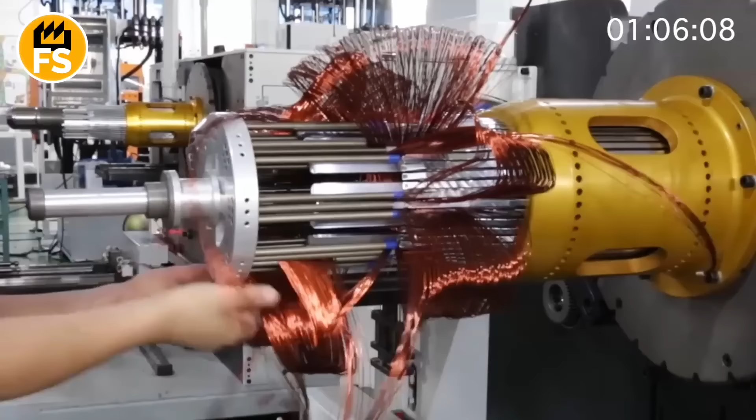Every year, over 300 million electric motors are manufactured worldwide, from miniature ones that spin coolers in laptops to giants that power trains, factory lines, and mine elevators. And each one of them is not just a coil of wires and iron, but a complex system of dozens of precisely calibrated parts. How is the heart of a machine born?

Why is winding similar to weaving and balancing to jewelry making? And how does one spark power a rotation that will last for thousands of hours? Let's take a look behind the scenes of one of the greatest technical processes, the creation of an electric motor.

Inside every electric motor is a true mechanical electrical universe. The main components of a motor are the stator, rotor, shaft, bearings, housing, as well as a cooling system and terminal box. The stator is the stationary part, located in a circle inside the housing. It's what creates the magnetic field that makes the rotor spin.

Inside the stator is a core made of layers of thin electrical steel, which reduces losses from eddy currents. In the slots of the core is a winding of copper wire, connected in a special way to create a rotating magnetic field. The rotor is the moving part inside the stator. It either has its own winding or is made in the form of a squirrel cage, aluminum bars cast into a steel core, which form closed current loops. When the stator's magnetic field interacts with the rotor, it starts to rotate.

The shaft is a rod that passes through the rotor and extends outside the housing. It's on this shaft that pulleys, impellers, reducers, or other drives are mounted. It transmits rotation to the mechanisms. The shaft must be precisely centered. Otherwise, the motor will vibrate and wear out quickly.

Bearings, usually two, one at each end of the shaft. They ensure smooth rotation with minimal friction. For reliability, they are lubricated with special greases or are sealed. The housing protects the internal elements from dust, moisture, and mechanical damage. It often has fins for heat dissipation or even a fan. The material is cast aluminum or cast iron, depending on the power and purpose of the motor.

The cooling system: most often it's simple air cooling, a fan on the shaft drives air flows through the housing. In large industrial motors, liquid cooling or external air circulation through special channels is used. The terminal box is on the outside of the housing. This is where the power cables are connected to the stator winding. Inside, contacts, clamping screws, and sometimes temperature sensors.

In the depths of the factory, in a workshop that smells of varnish, metallic dust, and warm insulation, stands a giant stator. A stationary ring with slots around its circumference. This is its core, made of thin steel sheets, tightly pressed together. In each slot of this ring will lie copper wire, carefully laid, loop by loop, turn by turn, because whether the motor will rotate at all depends on this.

Before starting the winding, the stator frame is thoroughly prepared. The slots are lined with special insulating liners, like nests for the wire. These are materials that withstand high temperatures, vibrations, and electrical loads. And only when they are sure that the insulation is perfect, the winding machine is started.

The machine, resembling a giant spool that unwinds copper wire from a bobbin, wraps it around guides and lays it in the slots. Everything is automated, but under the supervision of a specialist. One sharp movement, and the wire could lay with a kink or snag the insulation. And that's a potential short circuit.

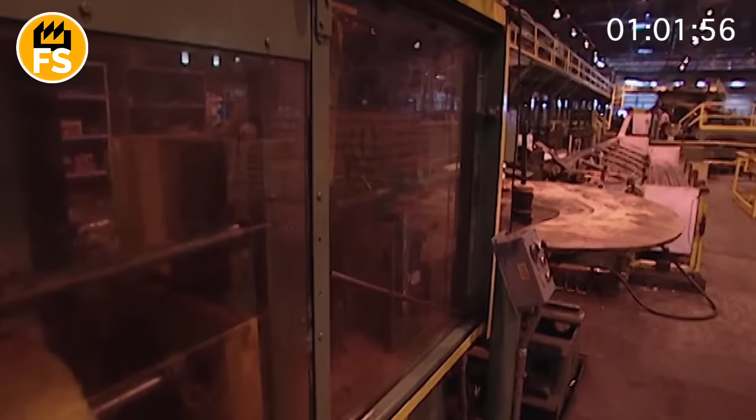For powerful or non-standard motors, winding is done by hand. A worker inserts the wire in a loop, pulls it through with a tool, presses it to the bottom of the slot, secures it, and tightens it. The work is similar to weaving, but with shiny copper and immense responsibility. Each coil, and there are dozens of them, must be identical, symmetrical, and correctly oriented.

After the first layer of winding is completed, interphase insulation is laid, and then the second layer is placed. The wire forms closed loops, phases, which are then connected in a star or delta configuration, depending on the motor's setup. Then, the wires are secured with strings or plastic fasteners. The tension and geometry are checked, and if necessary, adjusted by hand. And finally, impregnation with varnish or epoxy resin, so that all this doesn't shift even a micron under vibration and temperature under load.

If the stator is the skeleton, then the rotor is the muscle. It moves, rotates, creates torque. It's not visible when the motor is running, but it's what drives everything, from a fan to a train. At the core of the rotor is a steel shaft, long and powerful.

Around it, the core is mounted, a set of thin electrical steel sheets stacked into a cylinder. The sheets have slots. These are for the conductors. This is where the most interesting part begins, creating the winding that will make the rotor come alive.

One of the most common options is the squirrel cage. Aluminum or copper bars are inserted into the slots, and both ends are cast into rings, like a hoop around a cage. This creates a closed current loop. Such a design doesn't need to be connected directly. Current is induced inside automatically as soon as the motor starts. It's a simple, reliable, and mass-produced option for industry.

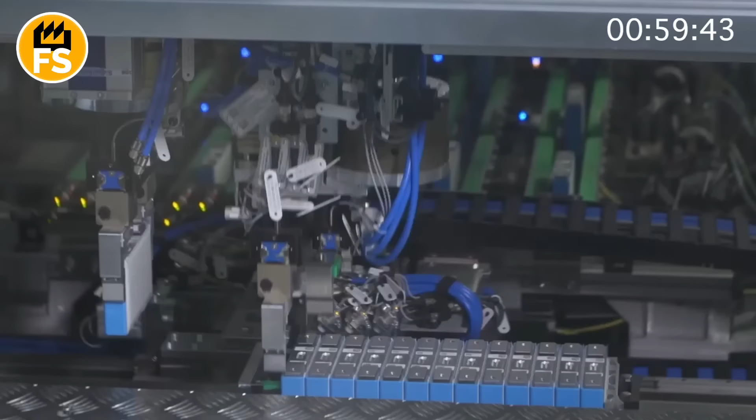But if the motor is more complex, more powerful, then classic windings are used. A worker manually lays copper wire in each slot, carefully tightening it, bending it at an angle. Here, symmetry, precise geometry of the turns, and perfect insulation are important. The wire must lie right, not touching the metal anywhere, not crossing over, not being too tight or too loose. A mistake, and the motor will overheat or fail.

The rotor windings are then connected in a specific sequence: star, delta, or another type of connection. Everything is secured, insulated, and sometimes varnished. The insulated ends are led out to slip rings or brush assemblies, depending on the design. After this, the rotor is balanced, as it has to rotate at speeds of thousands of revolutions per minute. Any extra 100 grams on the edge, and everything will vibrate, hum, and heat up.

The result? A compact, shiny cylinder with windings of copper wire or closed bars. It will be inserted into the stator, and the magic of converting electricity into motion will become possible. It all starts with checking dimensions and tolerances. The gap between the rotor and the stator, the so-called air gap, must be very small. If it's too narrow, friction will occur. If it's too wide, the magnetic field will be weak, and the motor will lose efficiency.

The rotor is mounted inside the stator via bearing assemblies. Sometimes special guides or hydraulic presses are used for this. The rotor shaft must rotate perfectly straight, otherwise everything will vibrate or break down within a week. At the ends of the rotor shaft, sleeve or rolling bearings are installed. They allow the rotor to rotate without friction. The bearings are placed in so-called end shields, which are then attached to the motor housing. All surfaces are pre-lubricated with special greases to ensure durability.

The ends of the stator and, if necessary, rotor windings are led out to the terminal box. Here they will be connected in the required circuit, star, delta, or another. In complex motors, temperature sensors are installed to detect overheating before a failure occurs. The motor is now assembled, stator and rotor in the housing, wires connected, bearings in place. But it's too early to start it. First, varnishing, drying, balancing, and testing, all like a ritual before the birth of a real machine's heart.

In a spacious room with a specific smell of epoxy resin, the stator windings, and sometimes the rotor, are coated with electrical insulating varnish. This isn't just for dust protection. The varnish strengthens the structure, secures the wires so they don't vibrate at high speeds, and prevents moisture penetration. Application is either by dipping in a bath or by spraying. The motor is completely submerged in a tank of varnish, then removed and left to drain off the excess. Next is drying in a thermal chamber at a temperature of 250 to 300 degrees Fahrenheit. This stage resembles baking. The varnish polymerizes and forms a hard protective film.

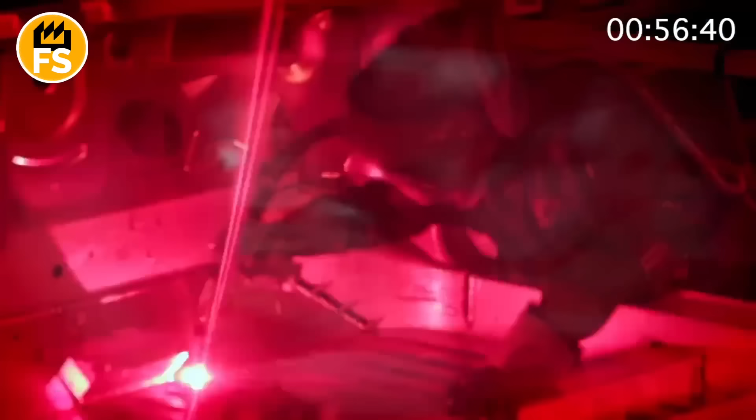After varnishing, the most sensitive stage, the motor is installed on a balancing stand. The system is like a huge record player. The motor rotates at high speed, and sensors detect the slightest deviations. Even a few grams of excess mass on the rotor can cause vibration that will destroy the bearings, shorten the service life significantly, or even ruin the motor. To eliminate the imbalance, engineers drill microscopic holes in the heavier part of the rotor, removing excess metal. This is almost a jeweler's craft.

The finished motor is sent to the test stand. Here it comes to life for the first time. It's connected to a power supply. Rotations, noise, heat, current consumption are recorded, and efficiency and power are measured. Everything is documented. The motor's passport contains dozens of parameters.

If the motor passes all tests, it's packaged, a seal is applied, and an instruction manual is added. And very soon, this motor could be working on a conveyor, in an elevator, or in an electric train, wearing down metal and converting current into motion, without rest for tens of thousands of hours.

Every year, the world produces over 200 million kilometers of cable, enough to wrap around the Earth 5,000 times. But few people know that the heart of every electric car is not just the battery, but also a cable that can withstand voltage, temperature, pressure, bends, and vibration.

How are these high-tech wires created, capable of working in conditions where even metal seems alive? How do scrap, dust, and molten aluminum turn into the arteries of Tesla, Rivian, and Lucid? In this video, the whole truth about the most engineered wire of the 21st century.

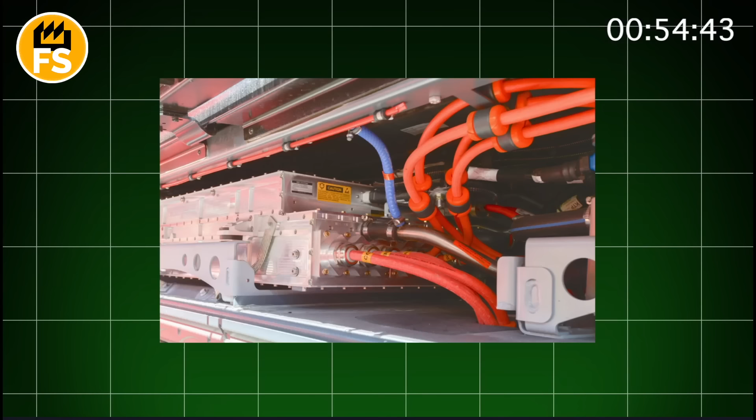Every cable for an electric car is a strategic choice. It must be flexible but not brittle, conductive but not vulnerable, lightweight but capable of withstanding hundreds of amps and thousands of hours of voltage. And when engineers sit down at the drawing board, they are like alchemists of the future, mixing formulas of elements in their heads, searching for the perfect balance.

Copper is the good old classic. It conducts electricity better than anything else, and it's its heart that beats in most cables. But the weight, oh, that weight! An electric car needs to be as light as a cat, so aluminum often steps in as a substitute. It's cheaper and lighter, though not as conductive. But in the right alloy, it's already a weapon of the electric age, and around it, insulation.

These are highly engineered polymers that can withstand heat, cold, chemicals, vibration, dust, and even a small lightning strike under the hood. They lack the shine or weight of metals, but without them, everything would turn into a sparkling inferno.

Some cables have shielding, a thin armor of copper braiding or aluminum foil. It protects signals from interference, because in an electric car, not only kilowatts are important, but every millivolt of data too.

Aluminum isn't born shiny. First, it's rough ingots, each weighing over 1,000 pounds. They arrive at the factory like aliens from their ore world, extracted from bauxite, purified, remelted, and finally formed into rectangular blocks resembling metal sarcophagi.

These ingots arrive in large trailers, carrying tens of thousands of pounds of the future. By appearance, they are just shiny silver blocks, neatly stacked on steel pallets. But just get closer, and you'll feel it. A warmth of energy emanates from them, encapsulated in atoms.

Sometimes, instead of ingots, the factory receives aluminum coils. This is already processed aluminum wire, wound into coils 3 or 4 feet in diameter, each weighing about 500 pounds. They shine like snake coils and glisten in the light, as if they just came out of a cybernetic beehive.

Separate batches are supplied as aluminum scrap, meaning leftovers from other productions, cuttings, shavings, fragments of frames. They are sorted, cleaned, remelted, because in this future, not a single crumb of metal goes to waste. As soon as aluminum enters the factory gates, it is identified, tested, and marked.

In the first stage, technicians inspect the ingots or coils, checking for cracks, corrosion, impurities on the surface. It's like a quick checkup, by eye, by hand, with a scanner. If rust, oxidation spots, or transport damage are noticed, the metal is either sent for remelting or rejected.

Next, chemical expertise. A piece of each ingot is taken and checked on a spectrometer. This device shoots the metal with a laser, captures the reflected waves, and shows how much aluminum, iron, silicon, copper, magnesium, and other elements it contains. The goal is to make sure it's the right grade.

After passing the tests, the ingots are marked with a batch identification number, alloy grade, date and place of melting, and sometimes a QR code that leads to a full technical passport. It's like a birth certificate that will travel with the metal until the moment it becomes wire and ends up inside a Tesla, Rivian, or Lucid.

When the ingots have passed inspection and received their quality mark, they are loaded into giant electric or gas furnaces. The temperature inside, over 1,220 degrees Fahrenheit, is exactly what's needed to turn aluminum into liquid silver. No alchemy. We're talking about molten metal.

The damper opens, and massive cranes carefully lower the ingots into the red-hot interior. The metal slowly melts, releasing a gray vapor and a strange smell, a chemical mixture resembling heated foil and ozone.

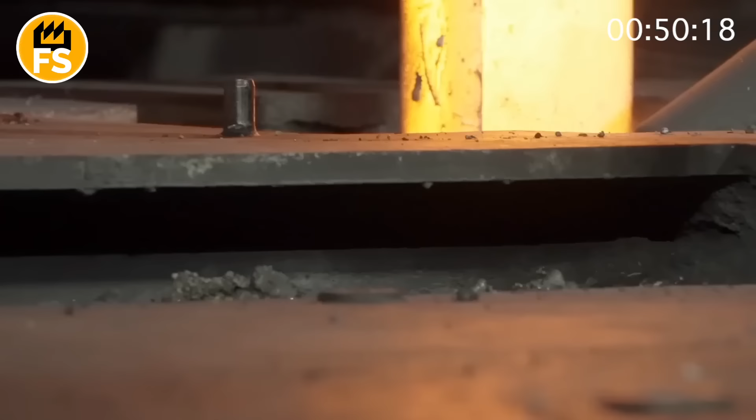Nearby, operators in heat-resistant suits looking like astronauts carefully monitor the furnace indicators: temperature, impurity level, viscosity. No mistakes are allowed here, as the cable for an electric car must withstand thousands of miles and hundreds of charges.

A slag layer appears on the surface of the molten metal: impurities, oxides, residues of alkaline metals. It is removed manually or by automatic systems to leave only a clean, homogeneous mass. Sometimes, modifiers or alloying elements are added to give the metal the desired properties: more conductivity, strength, flexibility.

Molten aluminum is poured into casting molds, usually round blanks 4 to 6 inches in diameter and up to 10 feet long.

These are the future rods from which cables will be drawn. The process is called casting billets. Cooling is controlled in stages to avoid cracks. All this is accompanied by hissing steam, the roar of pumps, and a rhythmic thud, the heartbeat of the cable factory.

So what is drawing? It's a process where aluminum rods are pulled through a series of increasingly narrow holes. With each pass, the metal becomes thinner, longer, and stronger. Like a piece of dough being rolled out into noodles, only instead of dough, it's hot aluminum, and instead of a rolling pin, hydraulic machines weighing tens of tons.

Before drawing, the blank is heated to an optimal temperature, no more than 650 degrees Fahrenheit, so it becomes plastic but doesn't melt. Then it's fed into a drawing machine, where the magical transformation begins. Each pass through the die reduces the wire's diameter by a few percent. It's like passing through increasingly tight doors, forcing the material to stretch.

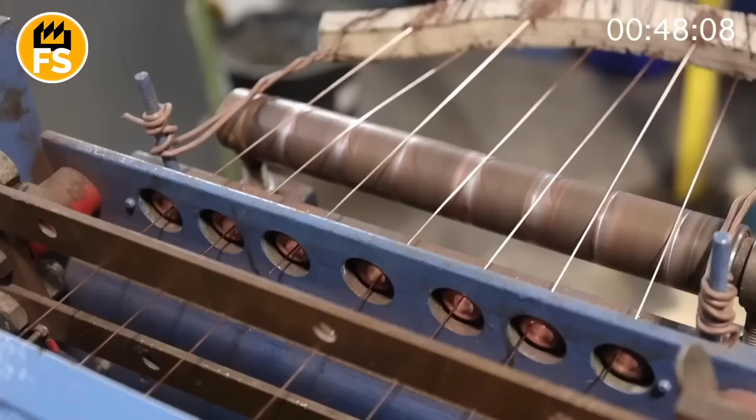After a dozen such passes, a thick rod half an inch in diameter becomes a slender strand 0.1 inch thick or even less. During drawing, the wire heats up from friction, so it's constantly cooled with water or special lubricants. Without this, it would overheat, lose its shape, or even break. Lubrication also reduces wear on the tools, dies made of carbide or diamond.

Some machines can draw wire at speeds over 2,000 feet per minute. It's like someone pulling a spider web from a ball of lightning. Engineers carefully monitor the tension, temperature, shape, and shine of the wire, because even the smallest crack or geometry violation is a future short circuit in a $60,000 car.

When the drawing is complete, the cable thread already looks like a shining string for a future electro-magical harp. It's long, thin, conductive, but still stubborn. To be able to wrap around batteries, penetrate narrow body channels, and withstand hundreds of thousands of bends in the motion of an electric car, it needs to be annealed.

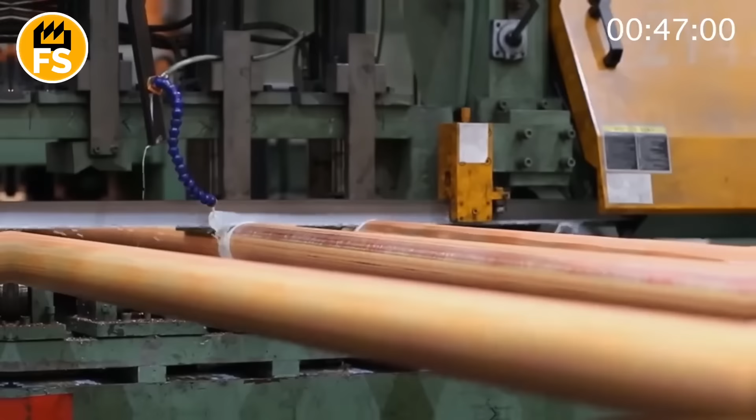The wire slowly passes through furnaces without an open flame, or through an induction field that heats it from the inside. The temperature, around 600 degrees Fahrenheit. This is the point where the metal doesn't melt, but changes its character. The atoms, which until now held onto their nodes in a stressed crystal lattice, finally relax. Like soldiers after a battle, like a string that has sounded at its maximum, and finally fallen silent. The metal structure becomes more uniform, the grains larger, and the wire itself flexible, elastic, calm.

The surface of the wire after heat treatment is darkish, with scale or signs of oxidation. It is cleaned off with abrasive brushes or in chemical baths. Aluminum must shine, like a star before a rocket launch. The cleaner the surface, the better the insulation will adhere.

Next, insulation. An ultra-thin layer of material is applied to the wire, separating it from everything except the current. This can be polyethylene, Teflon, silicone, or enamel, depending on the cable's intended purpose. The material is applied in liquid form, often in heated baths or through nozzles that cover the wire with a uniform flow. The application temperature, over 400 degrees Fahrenheit.

As soon as it's applied, it's immediately baked. The insulation doesn't dry, it polymerizes. It's like creating a skin around the nervous system. It must be perfectly even, dense, without microcracks. Otherwise, the wire won't pass the test.

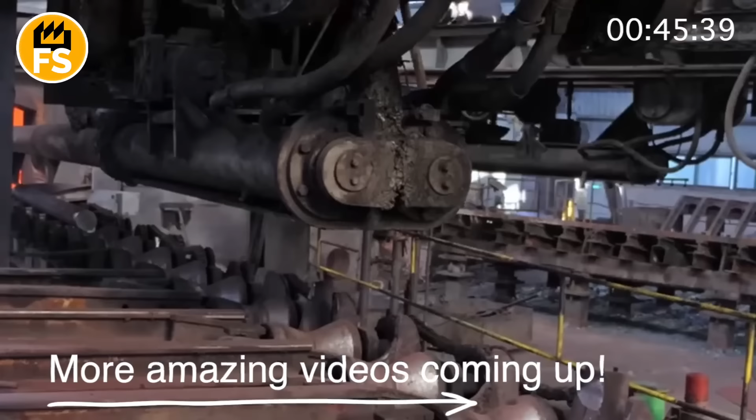Next, the wire passes through detectors that check it for breakdown, coating thickness, and electrical resistance. At least once every 1,000 feet, samples are taken manually and checked under a microscope. Everything is recorded because this wire will later work in high-voltage systems.

The finished wire is cooled, lubricated to reduce friction, and then carefully wound onto drums or spools, sometimes up to 5,000 feet long. This is no longer just metal, it's the nerve of an electric car, ready to hit the road.

Did you know that the machines powering global industry, transportation, and our electrical grids consume energy equivalent to building thousands of the Great Pyramids of Giza every single day? This hidden power isn't just about raw force. It's delivered by some of the most massive and awe-inspiring engines ever conceived.

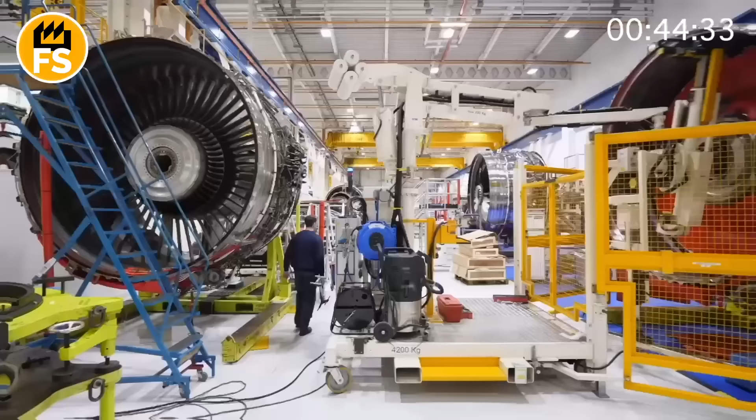From the dawn of the industrial age to today's modern world, engineers have chased the dream of bigger, stronger, more efficient powerhouses. Get ready to take a journey through history and dive into the incredible scale and engineering genius behind the world's most powerful and giant engines.

Our journey begins in the age of steam, a time when raw pressure was king. Picture the late 18th and 19th centuries. The engines that drove the Industrial Revolution weren't small. Early steam engines were clunky, but they quickly grew into colossal machines. Think of the beam engines, towering structures in factories and mines, with massive beams rocking back and forth, driving pumps and machinery with the power of boiling water. These were mechanical giants, their sheer physical size necessary to contain the immense forces of steam pressure.

As steam technology evolved, so did the engine's power and scale. Reciprocating steam engines became the heartbeat of global shipping. Imagine the engine room of a massive early 20th century ocean liner. You'd see multi-cylinder engines with pistons the size of trash cans, connecting rods like tree trunks, and crankshafts so large they needed multiple men just to inspect them.

These engines were colossal, spanning multiple decks, their rhythmic pounding driving propellers powerful enough to push thousands of tons across vast oceans. They were engineering marvels of immense moving parts, powered by the simple expansion of steam.

While steam dominated for a long time, the early 20th century saw the rise of a new kind of giant, the diesel engine. Unlike external combustion steam engines, diesels burn fuel directly inside the cylinder. This was a game changer for efficiency and power density. Early large diesels quickly found their way into ships and power generation.

Imagine a large, slow-speed marine diesel engine built for a cargo ship. These engines are absolutely colossal, often standing as tall as a multi-story building and stretching the length of a gymnasium. Modern marine diesel engines, like some built by Wärtsilä or MAN, are among the largest machines on Earth. The biggest ones have multiple cylinders, each with a bore diameter wider than a grown man is tall.

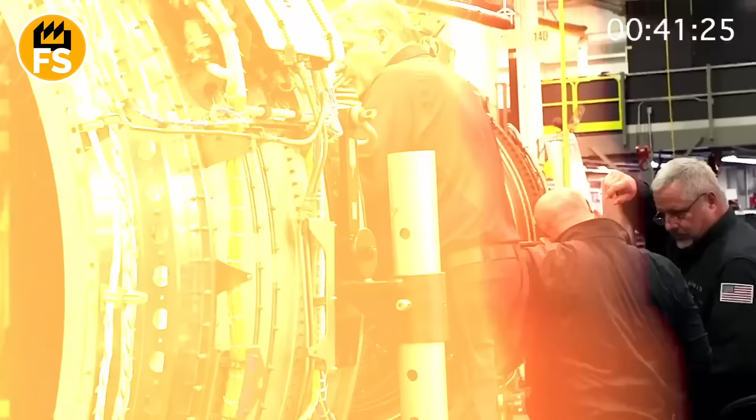Their crankshafts are multi-piece monsters, weighing hundreds of tons. These engines produce over 100,000 horsepower, enough to move supertankers and container ships carrying 20,000 containers. The sheer scale of these components, pistons, connecting rods, crankshafts, cylinder blocks, is mind-blowing, a testament to achieving immense power and torque from internal combustion.

As technology advanced further, especially in the mid-20th century, the gas turbine emerged as another powerhouse. Unlike diesels or steam engines that use pistons, gas turbines burn fuel to create hot gas that spins a turbine wheel, similar to a jet engine. While aircraft engines are built for power to weight, industrial and power generation gas turbines are built for sheer output. Imagine a power plant gas turbine the size of a bus or even a small house.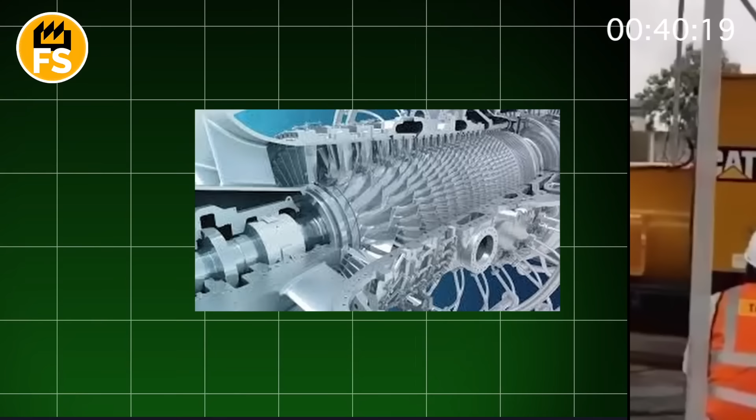Modern industrial gas turbines, like those in GE's H-Class, are engineering marvels generating hundreds of thousands of kilowatts, enough electricity for hundreds of thousands of homes from a single unit. They involve incredibly complex internal components, spinning at thousands of revolutions per minute in temperatures hotter than molten lava.

Their power output, efficiency, and relative compactness compared to older technologies make them the giants of modern electrical generation. Some large ships, including cruise liners, also use gas turbines for their combination of power and smoother operation.

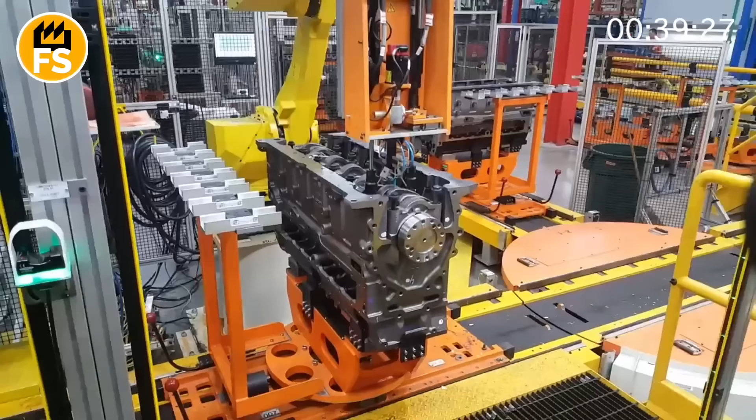Comparing these generations of giants is fascinating. Steam engines were the pioneers, relying on brute pressure and massive physical structures. Diesel engines brought efficiency and incredible low-end torque, dominating heavy transport. Gas turbines delivered immense power density and high-speed rotation, becoming the backbone of modern power grids and high-speed applications. Each technology pushed the boundaries of materials, science, and engineering to harness energy on an ever-increasing scale.

These engines, whether the visible, rhythmic giants of the steam age or the humming complex powerhouses of today, are the unseen heart of the modern world. They drive global trade across oceans, power the trains that move goods and people, generate the electricity that lights our cities and runs our factories, and fuel the massive pumps and machinery of heavy industry. They are a testament to humanity's relentless drive to build bigger, stronger, and more powerful machines.

So, the next time you see a massive cargo ship, a powerful train, or simply flip a light switch, take a moment to remember the incredible journey through history and the engineering genius behind the world's most powerful and giant engines. From towering steam engines and colossal marine diesels to blazing hot gas turbines, they are the hidden giants that built our modern world.

Did you know that each year the world builds structures so massive, skyscrapers scraping the sky, bridges spanning vast canyons, ships larger than city blocks, that they require metal parts shaped with forces equivalent to thousands of tons and precision measured in mere millimeters? This isn't just cutting and welding metal in a workshop. This is bending steel plates thicker than your arm, forging colossal parts under unimaginable pressure, and machining giant structures with surgical accuracy.

Get ready to witness the most impressive, largest-scale metal fabrication methods on Earth, uncovering the hidden power and precision that builds our modern world.

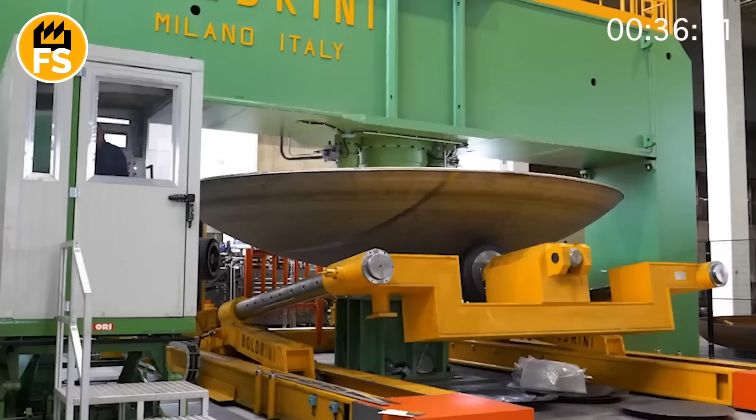The sheer scale of metal fabrication hits you right away on the factory floor. We're talking about moving and shaping pieces that weigh tons. One of the most fundamental and visually impressive processes is metal bending. Forget bending a paperclip. Imagine bending steel beams strong enough to support a building, or curving thick metal plates for ships and pressure vessels. Massive machines called press brakes or roll benders use incredible hydraulic force to shape metal.

Picture a giant press pushing down with thousands of tons of pressure to put a precise bend in a steel beam, or colossal rollers curving a thick steel plate into a perfect cylinder. These aren't just big tools. They're feats of engineering designed to apply immense force with fine control.

On the biggest scale, you see specialized machines like the FKB 3-roll plate bending machine, capable of shaping massive steel plates for tanks, wind turbines, or ship hulls with incredible accuracy. Software like Bentronic controls the rollers with millimeter precision, even on pieces the size of a room.

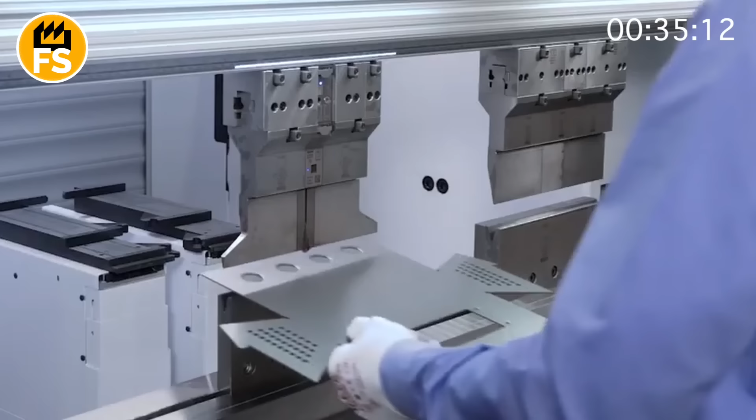Another impressive example is bending giant steel beams for structures. Machines like the Faccin RCMI use powerful hydraulic rolls and guide systems to curve huge I-beams or H-beams into exact shapes needed for complex architecture or bridges. Applying that much force while maintaining the beam's structural integrity is a true industrial art form, making metal flow like clay, but under thousands of tons of pressure.

Another mind-blowing method is metal forging. This is using localized compressive forces, often with immense power and heat, to shape metal. Think of a blacksmith, but on a scale where the hammer is a machine delivering thousands of tons of force. In massive forging presses, heated metal billets, solid blocks of steel, are pounded or squeezed into complex shapes.

This process changes the metal's grain structure, making the finished part incredibly strong and durable. This is how critical components for aircraft landing gear, engine parts, or even massive artillery barrels are made.

At places like the Watervliet Arsenal, you see iconic machines like the rotary forge. This is a different kind of forging, using rotating dies to hammer and shape a heated steel billet into a hollow tube, like a cannon barrel, with incredible speed and precision. These machines have been operating for decades, playing a vital role in producing thousands of heavy-duty barrels for military systems.

The sheer force and rhythmic pounding of these colossal machines working on red-hot metal is one of the most dramatic spectacles in metal fabrication, showcasing raw power precisely controlled.

Once metal parts are formed by bending or forging, they often need precision finishing. This is where machining comes in, using tools to cut away material and achieve exact dimensions and shapes. On the bigger scale, this involves massive CNC, computer numerical control, machining centers working on parts that weigh many tons.

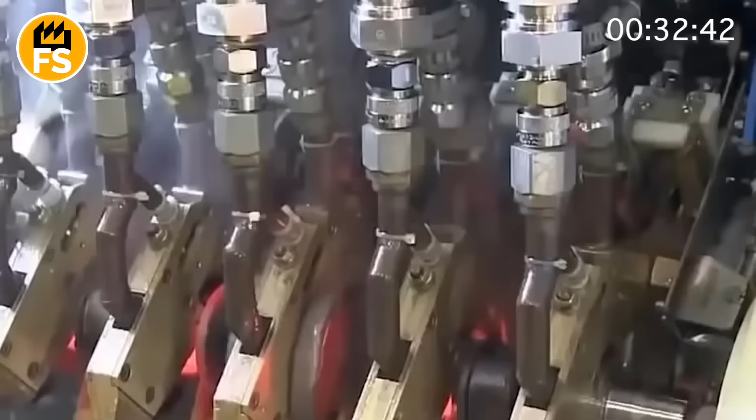Imagine a machine tool the size of a small house, precisely cutting, drilling, or milling a giant metal casting or forging with micron-level accuracy. Sophisticated software controls these machines, making complex cuts and achieving tolerances required for critical components in aerospace, heavy machinery, or energy production.

Precision machining isn't just about size, it's about achieving incredible accuracy on massive objects. Machines use advanced cutting tools made of hardened materials, sometimes cooled with high-pressure coolant, to cut through tough alloys.

On critical components like gearbox housings, turbine shafts, or large crane parts, surfaces must be machined to tolerances that ensure perfect fit and smooth operation under immense loads for decades. It's a process where technology allows engineers to sculpt giants with the precision of a jeweler.

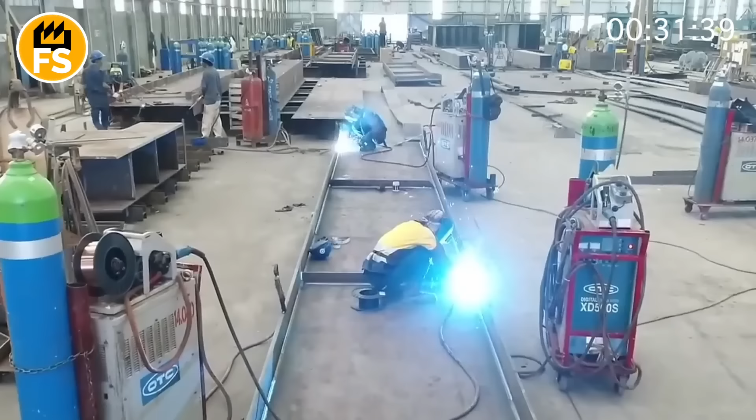Beyond these core methods, metal fabrication involves a host of other impressive processes on industrial lines. Cutting is a crucial first step, using powerful lasers, plasma torches, or water jets to slice through thick metal plates with incredible speed and clean edges.

Welding is joining metal pieces together, from automated robotic welding arms building vehicle frames or ship sections, to skilled human welders performing critical structural welds that must withstand massive forces. Surface treatment like sandblasting and industrial painting or coating lines protect the metal from corrosion and give it its final look.

Throughout all these stages, from the arrival of raw metal plates and beams to the final finished and assembled components, rigorous quality control is paramount. Industrial scanners, ultrasonic testing, X-rays, and precise measurement systems check every weld, every dimension, every material property.

Experienced technicians and engineers oversee automated inspection systems and perform manual checks on critical points. A blend of high-tech monitoring and human expertise, ensuring that these massive metal parts meet the highest standards of strength, precision, and safety required to build skyscrapers, planes, and infrastructure.

These massive metal fabrication facilities are not just factories. They are cathedrals of engineering power and precision. They process hundreds of thousands of tons of metal each year, shaping it into the backbone of our cities, transportation, and industries.

It's a testament to human ingenuity and technological advancement, taking raw materials and applying immense force and incredible accuracy to build the physical world around us. It's a hidden, necessary industry that few people ever see.

So, the next time you look up at a skyscraper, cross a bridge, or see a large machine at work, remember the mind-blowing industrial process that created its metal bones. The bending of giant beams, the forging of colossal parts, the precision machining of massive structures. It's all part of the amazing world of metal fabrication. It's a fascinating look into the power and precision that builds our modern world.

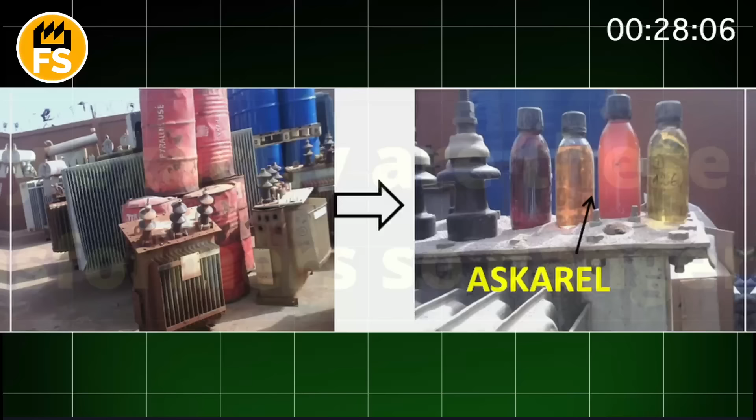So, why exactly are these old transformers so dangerous? For decades, many relied on a coolant liquid called askarel, which contains polychlorinated biphenyls, or PCBs. These chemicals are terrifyingly persistent in the environment. They don't break down easily, and they are highly toxic to humans and wildlife. Even a small leak from a neglected unit can contaminate soil and water for generations.

Modern transformers use safer, non-toxic oils, but the legacy of PCBs in older units means they cannot simply be scrapped like regular metal waste. They demand specialized, heavily regulated facilities designed specifically to handle these hazardous materials with extreme care and containment.

The intense process begins when old transformers, often behemoths weighing thousands or even tens of thousands of pounds, arrive at these specialized decommissioning plants. Picture massive yards filled with these silent, potentially hazardous giants, waiting to be processed on a dedicated industrial line. The absolute first step isn't dismantling or cutting. It's meticulous documentation and assessment.

Each arriving unit is rigorously inspected, its history and potential contents checked to determine if it likely contains PCBs or other hazardous materials. They are categorized based on size, type, and estimated contamination level. This initial sorting on an industrial scale requires heavy-duty lifting equipment, massive cranes and powerful forklifts, just to move these incredibly heavy pieces of electrical history into position for the next stage.

Once identified, categorized and positioned, the transformers move onto the dedicated high-containment processing lines. The absolute priority here is total containment and zero exposure. Every single step is designed with redundant layers of safety to prevent any spills or contact with the toxic materials inside. Workers operating on these lines are encased head to toe in specialized protective gear. Full chemical suits, filtered respirators, multi-layered gloves.

The air quality within the facility is under constant real-time monitoring. These are not standard factory conditions. They are hazardous material handling zones requiring maximum vigilance. The first critical task on this line is to meticulously drain the internal coolant oil. This oil, especially if it contains PCBs, is the most dangerous component, the liquid heart of the toxic secret.

Draining the hazardous oil is a highly precise, high-containment operation, executed with surgical care. Transformers are carefully positioned over multi-layered sealed collection systems, often including large secondary containment basins designed to catch any potential leaks or spills, no matter how small. Workers use specialized pumps, leak-proof fittings, and designated tools to access drain valves and carefully remove every single drop of the hazardous oil directly into secure, heavy-duty, properly labeled tanks.

This cannot be rushed. It's a slow, deliberate process. Think of it like disarming a complex device. Every connection, every hose is checked and rechecked multiple times. This step is the most crucial for protecting the environment from widespread contamination and ensuring the immediate safety of the workers directly interacting with the highly toxic liquid hidden within the steel shell.

After every drop of oil is confirmed safely drained and contained, the transformer must be absolutely de-energized and rigorously verified as safe from any residual electrical voltage. Even units that have been disconnected for years can potentially hold a dangerous charge.

Highly trained technicians follow strict, multi-step lockout, tagout, and grounding procedures, physically isolating the unit and discharging any potential buildup to ensure no electrical hazard remains before any physical dismantling tools come anywhere near the unit. Safety protocols here are layered and redundant, because any mistake made at this stage carries the risk of severe injury or worse. With all immediate electrical and chemical hazards neutralized, the physical dismantling begins.

The process of breaking down the thick steel shell to access the valuable materials and internal components. This is heavy-duty, industrial demolition work requiring powerful tools. Workers use intense plasma cutters that slice through thick steel casings with incredible heat, powerful hydraulic shears that crunch through metal like paper, and heavy-duty saws.

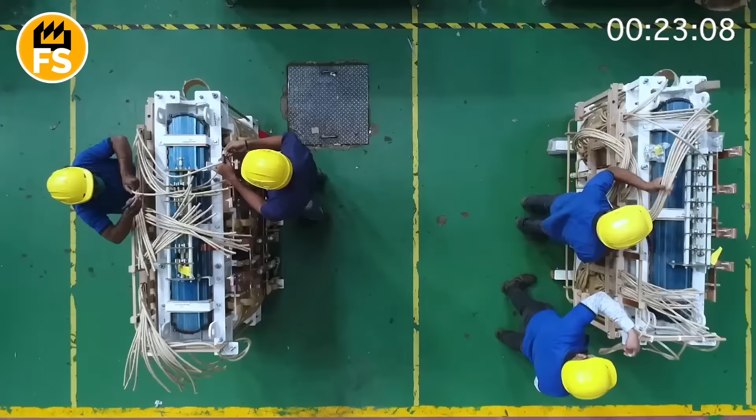The internal components, massive, heavy copper windings, dense steel cores, and various insulation materials, are often incredibly weighty and must be carefully lifted out section by section using overhead cranes and specialized rigging. Imagine cutting open a giant, multi-layered steel safe filled with tangled, incredibly dense, and heavy metal structures. It's a loud, sparks-flying process, but it's executed with engineering precision to efficiently separate the different material streams.

As the transformer is broken down piece by piece on the dismantling line, the various resulting materials are carefully sorted and separated onto different processing conveyors and areas. Valuable metals like the pure copper windings are isolated into their own stream and sent for high-grade recycling. Steel casings, cores, and other structural steel components are separated for scrap metal recycling. Aluminum parts are directed to their specific recycling stream.

But the key challenge, the hazardous legacy, lies with the contaminated materials. Any solid components that came into direct contact with the toxic PCB oil, internal insulation paper, wooden bracing blocks, contaminated gaskets, even metal parts that absorb the chemical, are now classified as hazardous waste themselves. Handling and disposing of this hazardous solid waste requires extreme care and strict protocols.

The safely drained PCB oil, the contaminated solid materials, and even the specialized protective gear worn by workers after handling these substances must be meticulously contained, documented, and transported for disposal according to stringent environmental regulations. This often involves complex logistics chains, moving the waste to highly specialized hazardous waste landfills designed to permanently isolate the toxins, or to permitted high-temperature incinerators, specifically designed and certified to safely destroy PCBs at extreme temperatures.

It's a costly, complex, and highly regulated part of the process, a hidden necessary step ensuring those dangerous chemicals never re-enter the environment to cause harm. Despite the inherent dangers and complexities, dismantling old transformers represents a vital dual purpose. Primarily, it's about environmental protection and safely eliminating hazardous waste legacy units. But it's also a significant part of the circular economy and resource recovery.

Valuable metals like pure copper, steel, and aluminum, weighing thousands of pounds in a single large unit, are recovered and reintroduced into the manufacturing supply chain. This reduces the need for environmentally impactful new mining operations. So, while the drive is safely neutralizing a threat, the process simultaneously recovers significant valuable resources, making it an essential, albeit dangerous, link in the critical lifecycle management of electrical infrastructure.

These highly specialized decommissioning facilities are engineering marvels in their own right. They process hundreds, sometimes thousands of transformers each year, ranging from common small pole-mounted units you see everywhere to massive multi-ton substation giants. Each unit processed represents a potential environmental disaster safely averted and a source of valuable industrial materials recovered, all thanks to incredibly precise engineering processes, cutting-edge safety protocols, and the unwavering skill and courage of workers operating daily in a high-risk, high-containment environment. It's a critical industry that literally cleans up dangerous industrial history.

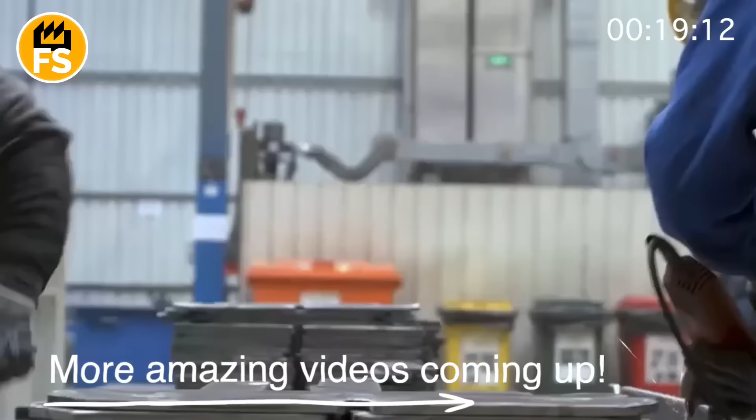So, the next time you see a transformer quietly working, or simply flip a light switch, take a moment to remember the unseen, dangerous, but absolutely essential industrial process happening far from view. The vital work of dismantling old, toxic giants, protecting our environment and communities from hidden chemical threats, and recovering valuable resources for the future. It's a fascinating, high-stakes look into a necessary industry few people ever see.

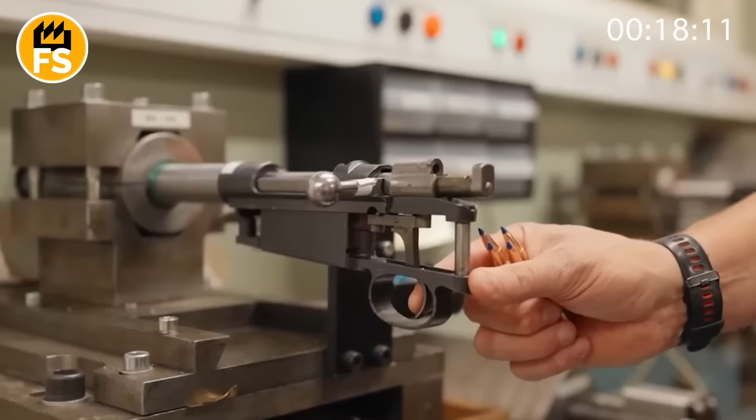From selecting gunpowder and alloys for the casing, to control tests where the muzzle velocity is almost 3,000 feet per second. Get ready. This isn't just a story about bullets. It's a journey into the heart of modern manufacturing, where technology and science operate at the edge of what's possible.

Hundreds of millions of bullets roll off factory assembly lines around the world every year, and each one passes through quality control lines with micron-level precision. The primary material is brass, an alloy of 70% copper and 30% zinc. It's ordered in massive rolls about 0.06 inches thick and weighing up to 6,000 pounds.

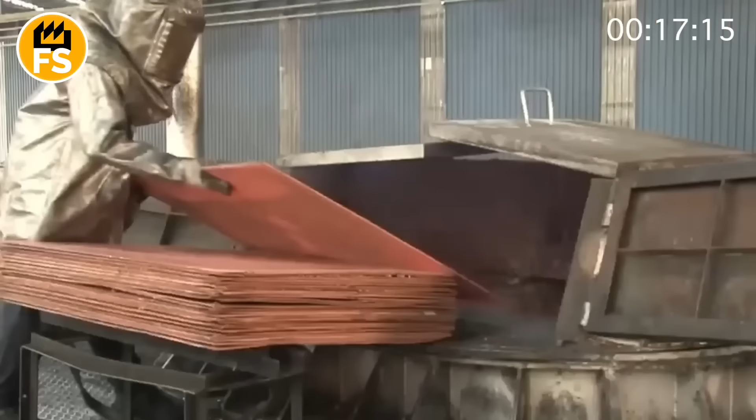These rolls are supplied by metallurgical plants, most often in the United States. These are companies like Olin Brass or Chase Brass. The rolls arrive in sealed packaging to prevent oxidation during transport. Upon arrival at the factory, the brass is uncoiled on a special platform and fed into a rolling machine, a huge heated steel drum. The metal's temperature at this stage reaches 600 degrees Fahrenheit to make it more pliable. The brass is flattened. Any deviation means rejection.

Next, the brass sheet is fed into a press line, a high-speed stamping press that, with lightning precision, punches out small discs, so-called blanks. Their diameter is approximately 0.75 inches, and their thickness matches the original sheet. The press operates at up to 250 strokes per minute, so every second yields a new batch of blanks. The resulting discs are heated to 800 degrees Fahrenheit. This is necessary for the subsequent deep drawing process.

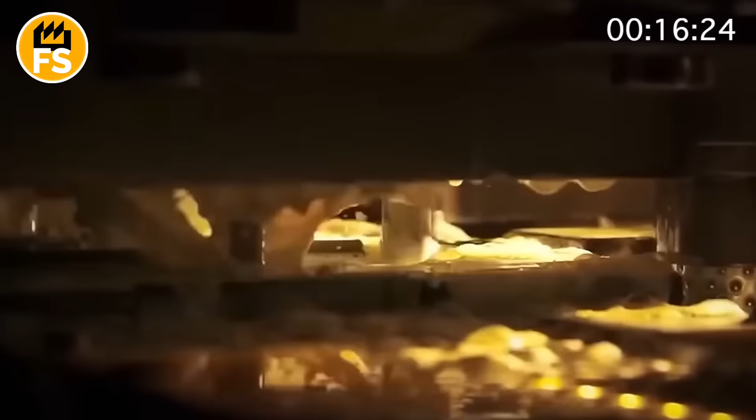They are dipped in lubricant and fed into a hydraulic press, where, under pressure of up to 100 tons, the disc is formed into a primary casing, still without details, just a cylindrical shape. This process is repeated several times, each time drawing the casing a bit longer and thinner. At this stage, the blank already resembles a casing, but is still far from its final appearance.

Each casing is annealed after drawing. This involves heating it to 1000 degrees Fahrenheit to relieve internal stress in the metal. Otherwise, the casing could crack during firing. Then, it's cooled in water and cleaned in an acid solution to remove scale and lubricant.

Next, calibration and weighing. The casings pass through a high-precision laser control system. A weight discrepancy means automatic rejection. Length, wall thickness, cylindricity, and even acoustic response are similarly checked. Special sensors detect if a casing has microcracks or internal defects.

Finally, the casing is trimmed to the exact length, a groove for the primer is cut, and the mouth is expanded to accept the bullet in the future. Then it either goes to the final assembly line or is packaged for separate sale. Casings are bought for sport shooting and military orders alike.

The next critical stage is primer installation. This is a small but extremely important component that initiates the explosion. The primer is a miniature explosive device. Inside a metal cup is a primary detonator, usually based on lead styphnate or lead-free substitutes. Before installation, primers are checked for sensitivity. Those that react to a weaker impact or have an unstable explosive concentration are rejected.

On an automated line, each casing passes through a priming station where, with incredible precision, a mechanism inserts the primer into the rear of the casing and crimps it so it doesn't fall out during recoil. Next, gunpowder. The type depends on the ammunition's purpose. For pistol rounds, most often spherical smokeless powder. For rifle rounds, extruded powder in the form of small tubes.

On average, one .223 Remington round contains about 24 grains of powder. For comparison, a .45 ACP round contains only 5 or 7 grains. Gunpowder is measured automatically to the thousandth of a grain. Too much or too little is a danger to the shooter and the weapon. An error of 1/10 of a grain is unacceptable. Some systems use real-time optical scales that react even to vibrations in the workshop.

Once the powder is loaded, it's time to seat the bullet. The bullet itself is another story. Material, shape, mass. Everything depends on the task. Hunting, military, sports, defense. But seating occurs with the same precision. The bullet is pressed under pressure into the casing, and then the mouth is crimped so it doesn't pop out during feeding into the barrel.

After this, final calibration and visual inspection. By eye, through a camera with a neural network that manages to analyze each round in less than a second. The rejection rate is less than 0.3% at large enterprises. And only after all stages of inspection, calibration, and final weighing does the bullet reach the final phase: packaging.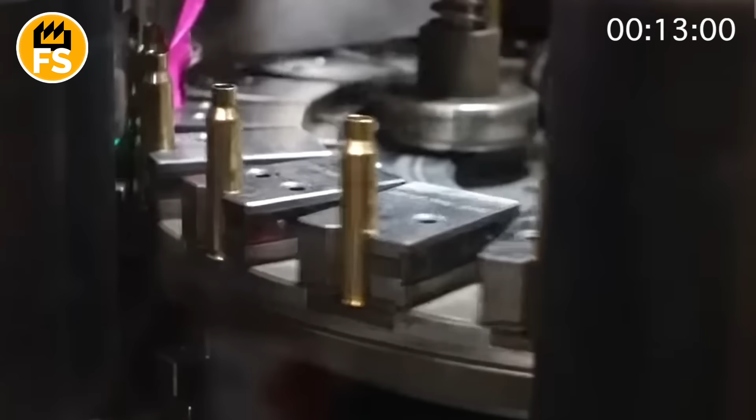Packaging isn't just about aesthetics or ease of transport. It's a matter of protection, identification, and logistics. Because when you're shipping 50,000 rounds to a single client, mistakes are not forgiven. It all starts with counting. Bullets are automatically sorted into trays or fed onto weighing lines, where batches are formed in quantities of 20, 50, 100, or 1,000 pieces, depending on the customer's specifications.

The cheapest packaging option is plastic trays with shrink wrap. This is a budget solution for the civilian market, convenient for shelves and mass sales. Military supplies are packaged differently, in zinc or steel containers with airtight lids. Inside, liners with anti-corrosion treatment, markings with caliber, lot number, manufacturing date, and QR codes. One such box holds from 1,200 to 1,500 bullets, with a total weight of up to 40 pounds. In some cases, containers with moisture control systems, or even built-in trackers for delivery monitoring.

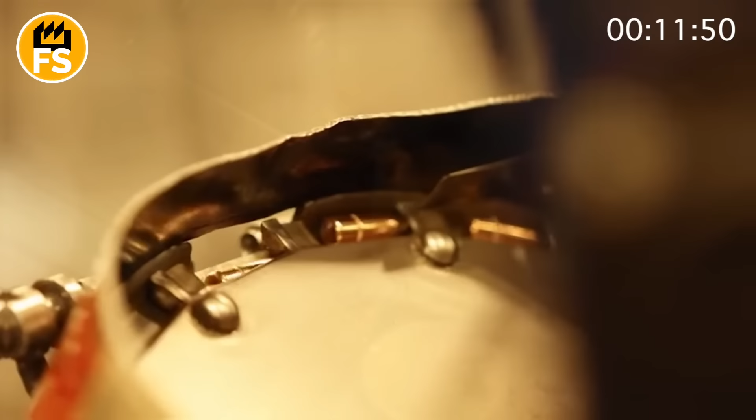On industrial lines, one shift packages from 100,000 to 300,000 bullets. Some factories operate in 3 shifts, 24/7, especially during periods of high demand such as military contracts, crises, or elections in the United States. The productivity of one packaging machine is up to 12,000 units per hour.

In workshops with gunpowder, primers, and explosives, there is anti-static flooring. This is a special coating that diverts electrostatic charge from a person's body or equipment to the ground to prevent sparks that could cause explosions or ignition of explosive substances. Also, the humidity in the workshop is maintained at 40 to 60%, which reduces the risk of dust or particle ignition. In areas with metal dust, oil vapors, and fumes from galvanizing, ventilation with filtration is mandatory.

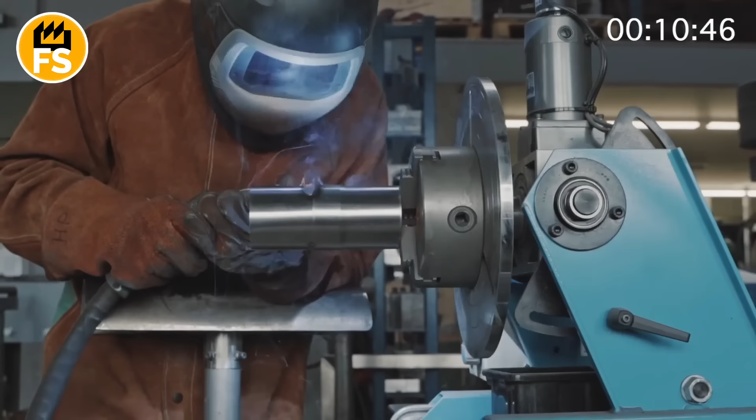Workers wear special suits made of natural fabrics or anti-static materials. It is forbidden to wear metal objects, watches, jewelry, or phones. Only certified specialists are allowed in the gunpowder or primer areas. Access is strictly biometric. People do not touch gunpowder by hand. Everything is handled through sealed automated systems. Primer formation, explosive mixture dosing, casing sealing, all are maximally automated. Robots or shielded machines handle the most dangerous stages.

Powder fire extinguishers, sprinkler systems, and special containers for isolating ignition are placed every 150 feet. Personnel undergo mandatory training every 3 or 6 months. Evacuation, firefighting, first aid. All casings, bullets, and primers undergo visual, weight, and X-ray inspection. Rejects are sent to separate safe zones where they are disposed of or recycled. The factory is guarded like a high-security facility. Video surveillance, armed guards, inventory of every unit.

In 1998, in the United States, a plant manufacturing gunpowder for sport ammunition exploded due to violations of storage rules. Several types of mixtures with different properties were stored nearby. The explosion's power was equivalent to several tons of TNT. 4 workers died. The investigation revealed dozens of systemic violations. Therefore, safety at such plants is more important than the product they manufacture.

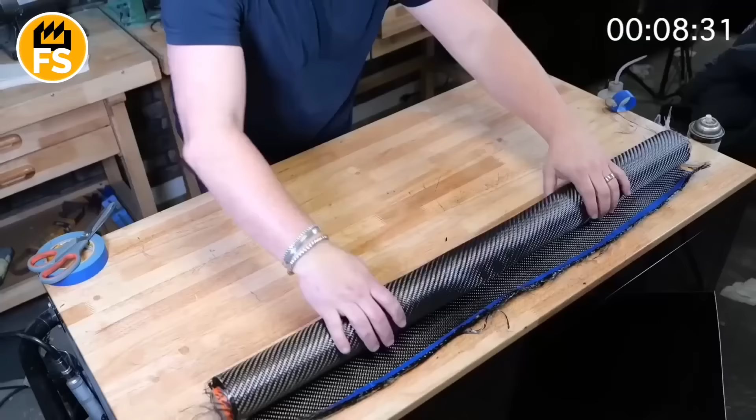Imagine a material lighter than plastic, but 10 times stronger than steel. It's the stuff they use to make National Aeronautics and Space Administration rockets, high-performance race cars, and armor for fighter jets. But you know what the paradox is? This super material is almost impossible to recycle. Its production is mind-blowing. Scorching furnaces, molecular transformations, nanotubes, cold plasma. But what happens when these parts wear out or break? The world got hooked on carbon fiber, and now it doesn't quite know what to do with it. In this video, the whole truth about the strongest material of our time. Don't touch that dial. It's about to get even stronger.

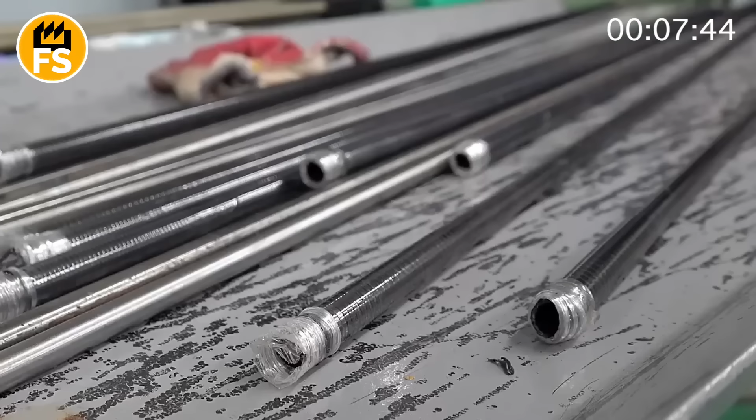After carbonization, the fibers might undergo additional treatment, such as applying a coating to improve adhesion with a composite matrix. The resulting carbon fibers are collected into fabrics or matrices of various structures. These can be unidirectional bundles, woven fabrics, rolls, and so on. The choice of structure depends on the final application and the required mechanical characteristics. Next, these fabrics are impregnated with special resins, epoxy, polyester, or others, which allows for the creation of a composite material, a carbon fiber reinforced polymer composite. This composite boasts high strength and rigidity while remaining lightweight.

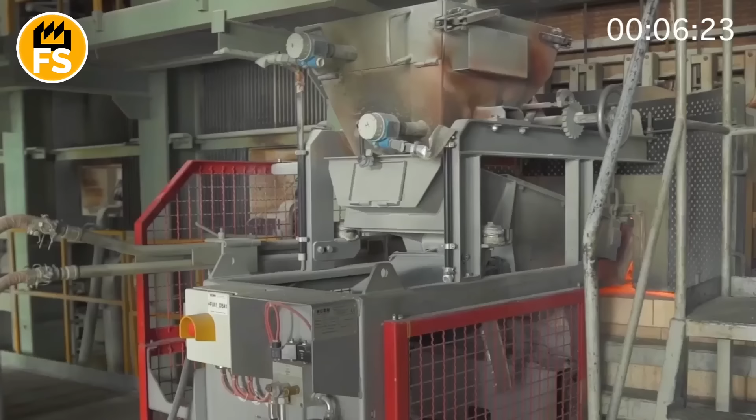Lamination is the process of layering sheets of resin-impregnated carbon fiber fabric into a mold, where under pressure and heat, the resin polymerizes and the material hardens. The result is a strong, lightweight, and durable part in the desired shape. Thanks to its unique combination of lightness and strength, carbon fiber has found wide application in many fields. In automotive manufacturing, it's used for making body panels, suspension parts, and interior elements. This significantly reduces the car's weight, improves dynamics, and lowers fuel consumption.

In aviation, carbon composites are used in fuselages, wings, and other structural components of aircraft. This increases fuel efficiency and reduces carbon emissions. In the space industry, the material is used in the production of rocket bodies, satellite panels, and elements of space stations. Carbon fiber withstands the extreme conditions of space and has high durability.

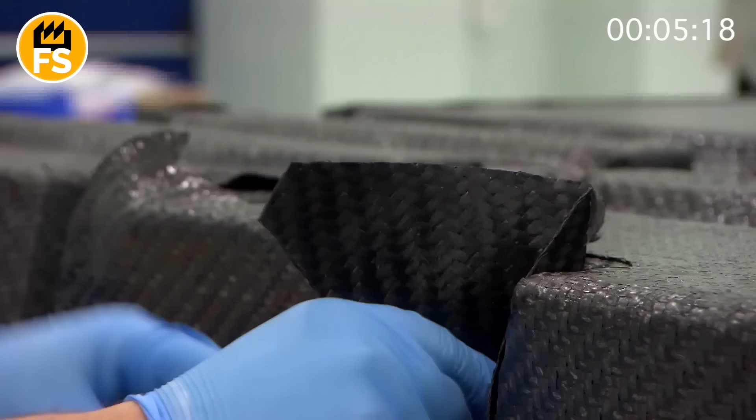Bicycles, tennis rackets, skis, boats, and even sportswear are made from carbon fiber to enhance performance characteristics. And reinforcing concrete structures with carbon composites increases their strength and resistance to corrosion. This material offers high strength at low weight. After all, carbon fiber is 5 or even 10 times stronger than steel, but significantly lighter.

The fiber has excellent resistance to corrosion and chemical attacks. It also boasts high stiffness and resistance to material fatigue. Plus, it allows for the formation of complex shapes and parts, and it has thermal stability and a low coefficient of thermal expansion. But the high cost of production limits the use of carbon fiber in mass manufacturing.

Also, the material is brittle and can fail under strong point impacts. Undoubtedly, carbon fiber is difficult to repair and recycle, and its mass use is also hindered by the energy intensity of the carbonization process. Carbon fiber continues to evolve thanks to innovations in production technologies and new areas of application.

New carbon fiber production technologies aim to increase efficiency, reduce energy consumption and material cost, and expand the raw material base. One of the most promising discoveries is the cold plasma pyrolysis method, developed by David L. Chandler at the Massachusetts Institute of Technology. This process uses ionized gas at room temperature to break down polymer fibers into carbon fibers. Such an approach significantly reduces energy consumption and harmful gas emissions compared to traditional high-temperature pyrolysis.

Furthermore, research in the field of carbon nanotubes opens up new possibilities for creating fibers with improved mechanical and electrical properties. For example, a team of Chinese scientists developed double-walled carbon nanotube fibers using a dry jet wet spinning method, providing high electrical conductivity, up to 86% of copper's conductivity, tensile strength, and high toughness. These fibers demonstrate durability even after 5,000 bending cycles, making them promising for the aerospace industry and energy storage.

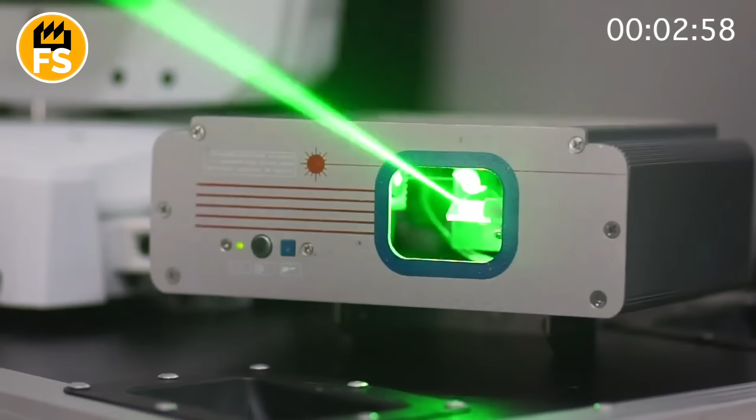Other innovations include the use of computer modeling and simulations to predict the properties of new materials and accelerate development. The company 3M, for example, uses ultraviolet, electron beam, and laser irradiation to create high-precision structured materials that enhance the strength and stiffness of carbon fiber-based composites.

Developments are also underway for new technologies to reduce cost and improve the environmental friendliness of production, particularly using waste from the pulp industry as raw material, which reduces industrial waste and makes the process more sustainable. In the future, further improvements in production technologies are expected, along with the emergence of hybrid composites with nanomaterials and the expansion of carbon fiber applications, from transportation and construction to energy and electronics.

Recycling carbon fiber is currently a complex and important process, as this material is widely used in high-tech industries, but its waste is difficult to process due to the complex structure of composites. There are several main methods for recycling and reprocessing carbon fiber reinforced composites.

Mechanical recycling involves shredding the waste and separating it into resin particles and short carbon fibers. The short fibers are used as filler in construction or for manufacturing plastics. This method is simple and environmentally friendly, but it damages the fibers, reducing their strength. There's also high-temperature pyrolysis.

Microwave-assisted pyrolysis involves irradiating the waste with microwaves, which accelerates resin decomposition. The method is simple and effective, requiring less equipment. Chemical recycling, or solvolysis, involves dissolving the resin in special solvents, such as nitric acid with alcohol or supercritical fluids, allowing the fibers to be separated without damage. The fibers retain their length and strength, but the method is expensive and currently mostly laboratory-based.

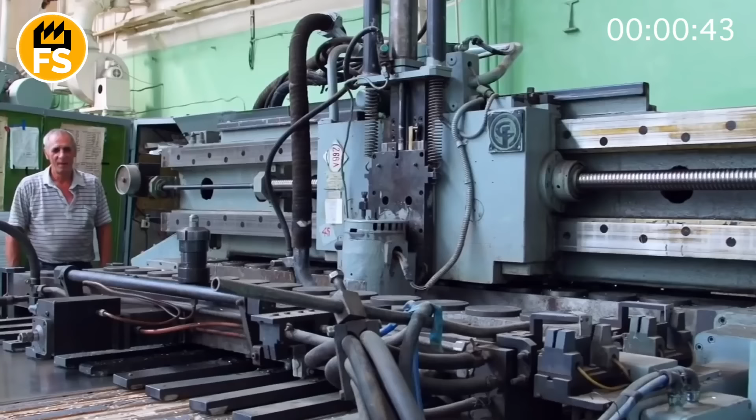Other recycling methods for this fiber include radiation exposure to break down the matrix, ultrasonic treatment, and the development of new chemical reagents to separate the composite components. As you can see, the bigger challenges right now lie not in producing the material, but in recycling it.

Recycling carbon fiber is crucial for reducing the environmental burden, as composite waste does not decompose naturally and takes up significant space in landfills. Modern technologies allow for the recovery of secondary fiber, which can be used in construction, plastics production, and even for reinforcing concrete structures.